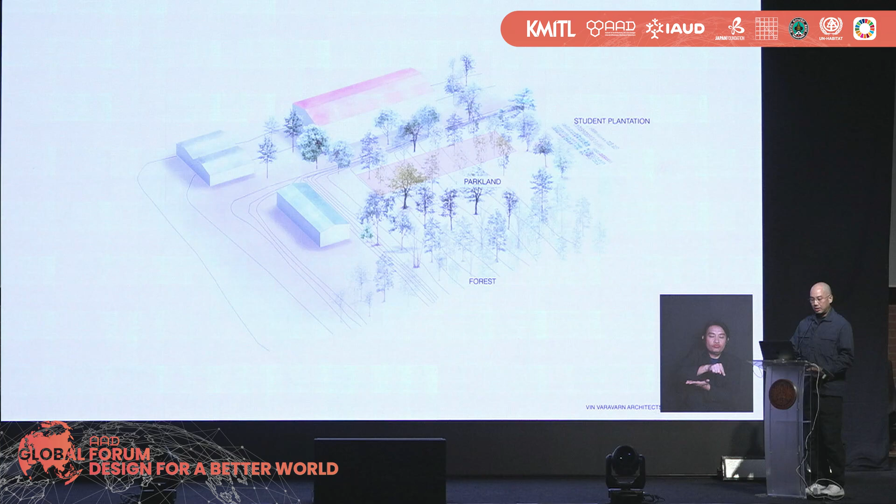Our site, which was given by the school, is located on the hill higher than the original school ground. The land slopes all the way from the end toward the front of the site. But the good thing is that the site is surrounded by beautiful natural environment - parkland, forest, and the student plantation at the back.

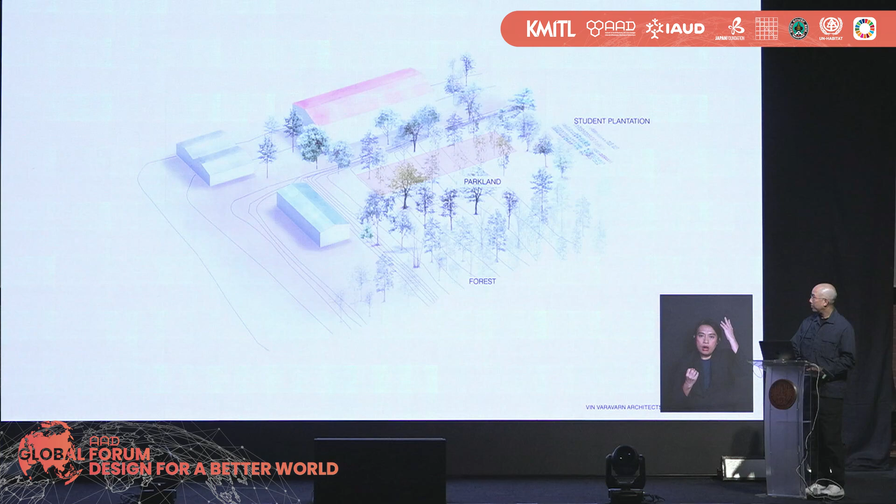During that time, we found research on how nature, environment, and a relaxing atmosphere can help the long-term development of special students. We therefore decided that since we do not have any budget, we will make use of the thing that we already have - the beautiful nature of the site.

We then proposed to the school that the new classroom would become an open pavilion in nature. The students can connect to the nature around them, creating a relaxed atmosphere which can benefit their learning development.

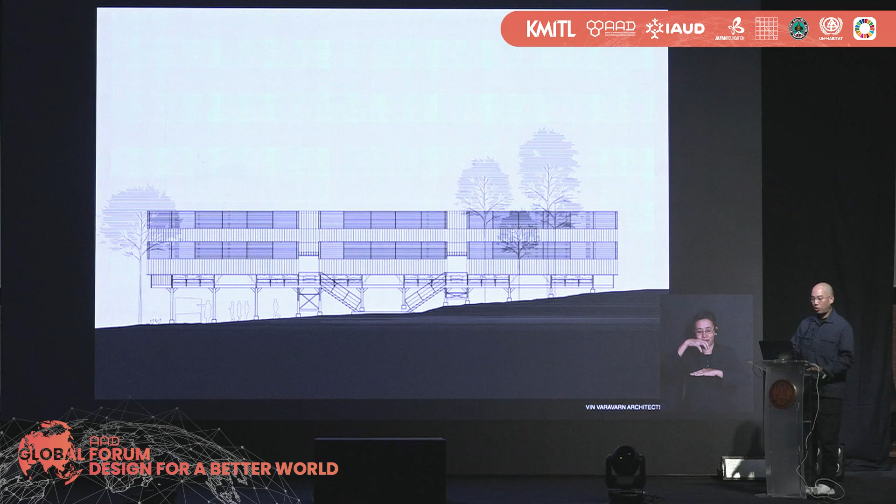The proposed design is a simple building situated within the parkland. It's a long gable roof pavilion which rests above the ground slope. The building becomes as a pier that reaches from the ground on one side into the air on the other side. This concept creates a semi-outdoor space underneath for different school activities.

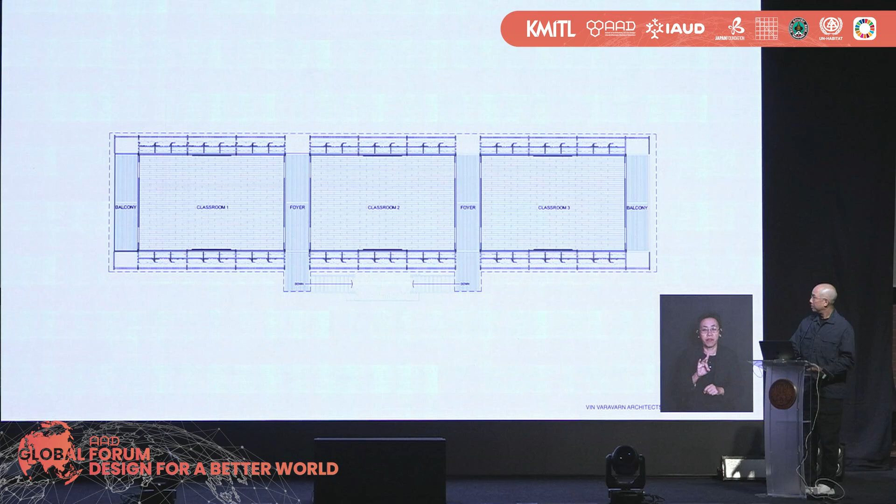Three classrooms with 58 square meters each have been combined into one building to minimize the land use. And the back end connects to the ground to provide easy access and can be used as a terrace where students could gather and socialize.

The form of the roof is designed with a pitch higher than normal to shield the interior from monsoon rain, without having a long span eave, just to minimize the damage to the surrounding trees. At the same time, the roof form creates a suitable structural rigidity to withstand the force of an earthquake.

All the structural elements had been designed to be exposed to reduce unnecessary decoration. We very much want to see the school become a learning tool for students and the local people to learn and understand about earthquake-proof building, which they have never seen before.

The selected building materials are lightweight to reduce the momentum when the earthquake occurs, and thus reduce human fatality. Natural local materials such as bamboo had been proposed in selected areas to substitute the expensive modern materials.

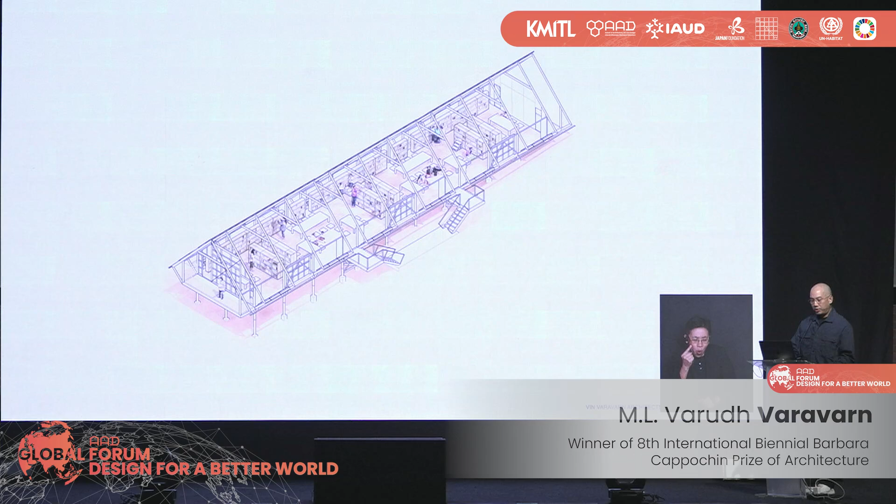With a total construction cost of $46,000, we think that with the simpleness of the architecture, it could provide more opportunity to the community. In the future, with modification of some architectural elements, we believe that the structure could apply to many other schools in different locations, or even other types of buildings, such as library, canteen, or etc.

We also propose the idea of how the community can use this simple building as a prototype to adapt into their earthquake-resistant house if they need it.

In 2017, two years later, after our first school had been completed, we had been contacted by a foundation named the Build Foundation, who wanted to use our first school as a prototype to construct two more classroom buildings for another school in the upper north part of Thailand. The name of the school is Ban Hong Hae School, located in Mae Sai area, upper north of Thailand.

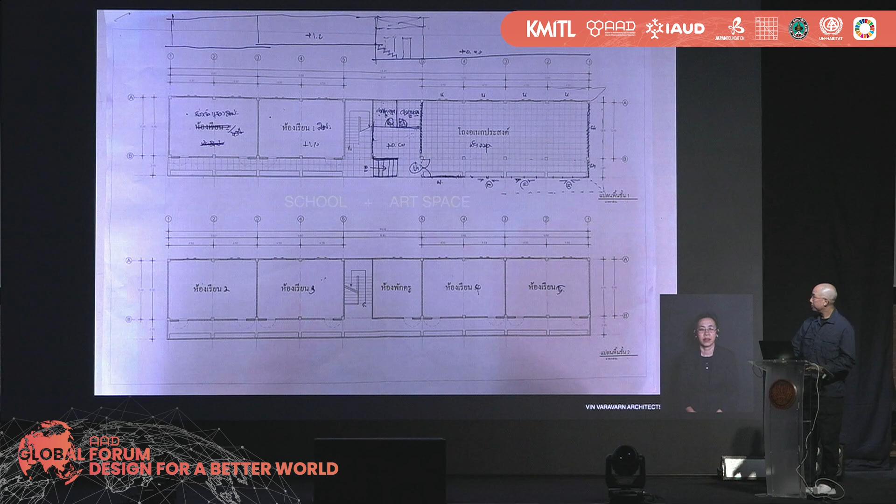This is a function layout requirement given to us by the school, which is a typical type of Thai school building. We chose to respect and incorporate the layout and arrangement of the rooms that the school requires into our improvement. We propose to rotate the classroom on the second floor in another direction, which can give some double space inside the building for natural light, ventilation, and visual connection between 2 floors.

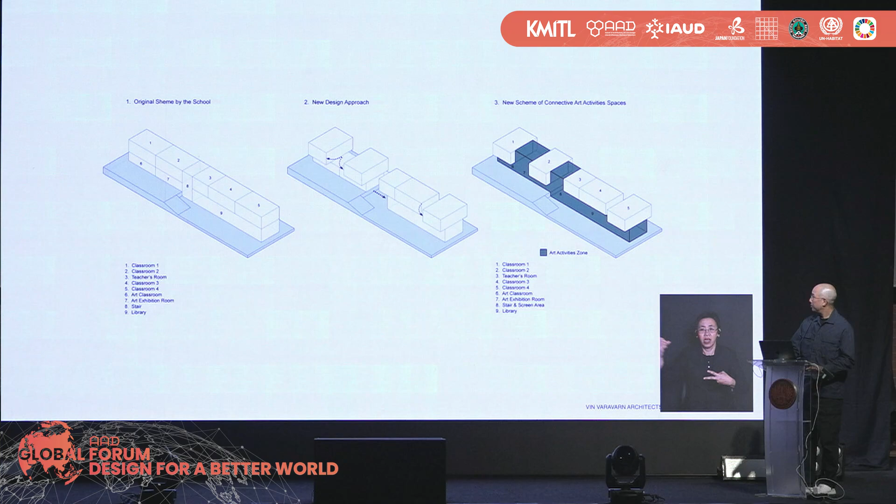All the functions on the ground floor can be related to each other as connecting creative spaces.

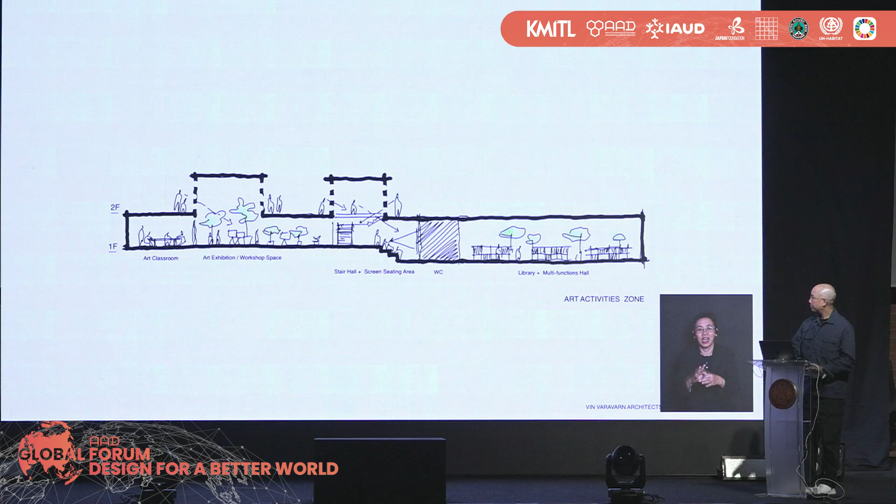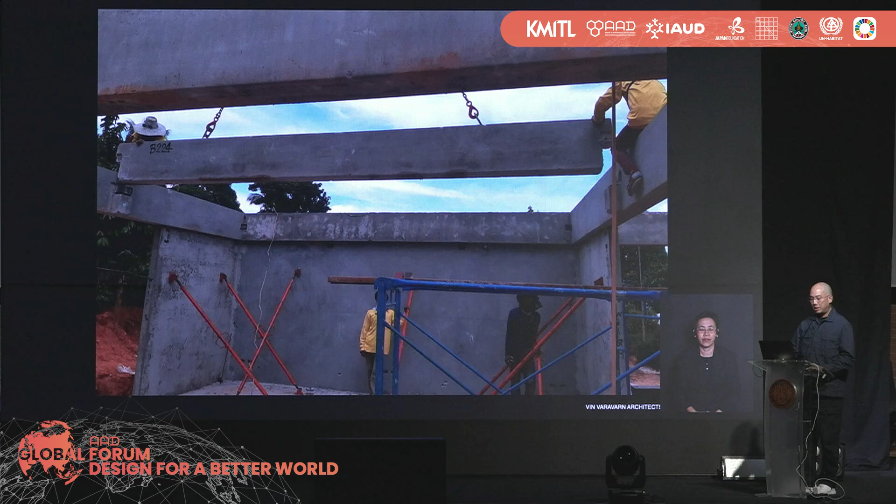Because of the very limited time and the lack of labor on the island, our team had decided to design the building using a prefabricated concrete structure that can be transported from the mainland into the island, with support by our alliance, which are the precast concrete company and the local sea transportation. So all structures were constructed piece by piece like Lego. It's quite fast and precise.

And again, the foundation had invited a group of volunteers to come participate with the construction. For our team as well, it became like our annual trip to join this volunteering campaign every year. The construction completed within 2 months, during the school holiday period.

On the second floor, the building will consist of 4 new standard classrooms and a teacher's room as requested by the school. And on the ground floor, the building will provide a new art space for students. The bigger art classroom, the workshop, and the exhibition space are combined into one big art space.

The spaces on different levels are connected. The void also helps to create good ventilation and bring natural light into the art space below.

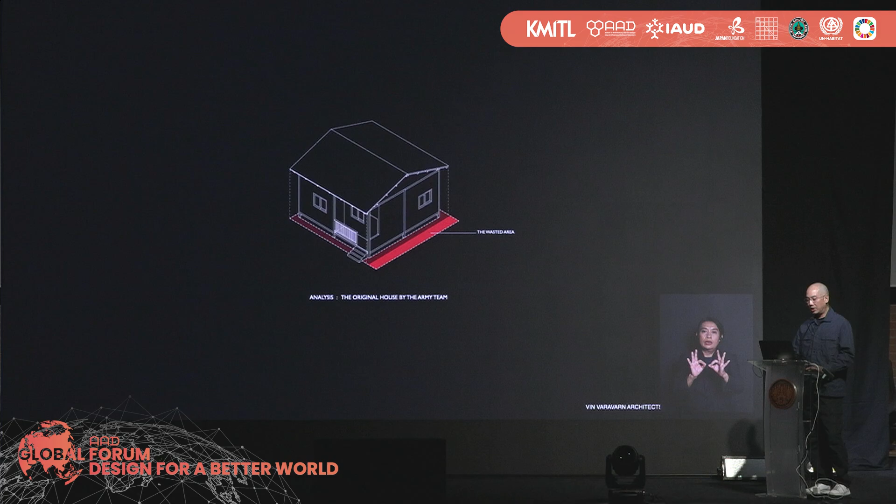We also discovered that the land in the community varies significantly in size and shape, which is quite unusual and diverse. One type of house prototype would never fully utilize such varied shapes of land, so we decided we needed to propose a totally new design to solve this problem.

The new design solution proposes a very simple form of house, a concept that can adapt to the variation in land shapes and sizes. The land can be fully utilized according to the community's requirements, and it is also easy to construct and modify by the Army team, who are not professional contractors.

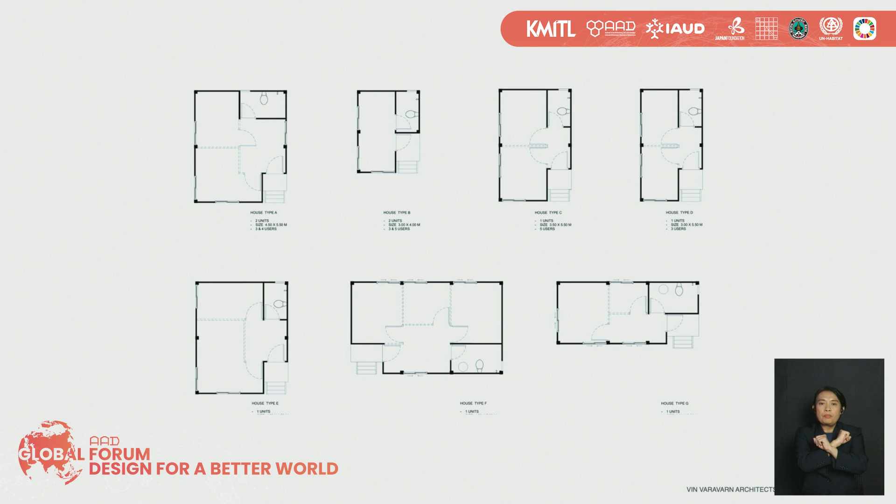Each house plan was designed with as many separate rooms as possible. This is to protect against cases of sexual harassment within the family, so that kids and women can have their own bedroom at night.

Klong Toei community is one of the most difficult construction sites we have ever been involved with, with a toxic trash swamp and very limited space. The site is located deep inside the community with very narrow walkways. Construction machinery cannot access the site at all, so all construction materials needed to be lightweight in order to be carried and constructed by hand by the Army team.

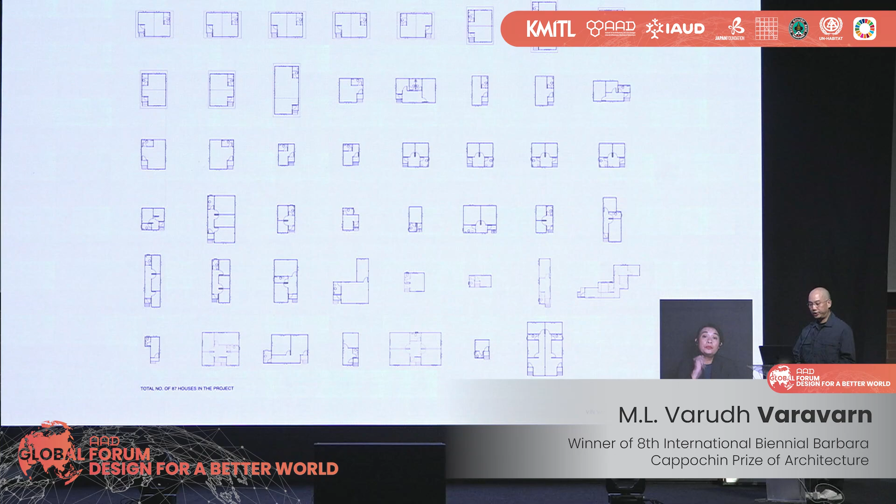So over 3 years, from 2019 until 2022, we designed and constructed 47 new custom-made houses out of a total of 87 houses in the program for homeless people in the Klong Toei community.

Over the past 10 years, we have learned that projects like this cannot be successfully completed without good teamwork. A good team and collaboration from all parties are essential to help solve problems from every dimension. We were lucky to have the opportunity to work with many great teams for different communities across various rural areas throughout the country, allowing us to learn a great deal.

We have witnessed diverse lifestyles from communities living in the water deep inside the heart of national forests, without clean water or electricity, to different hill tribe communities residing in remote, difficult to reach mountainous areas with very limited access to education.

They don't even know who an architect is or what architecture is. This highlights the critical gap within our society, and also a big gap in our profession as architects with people of all levels.